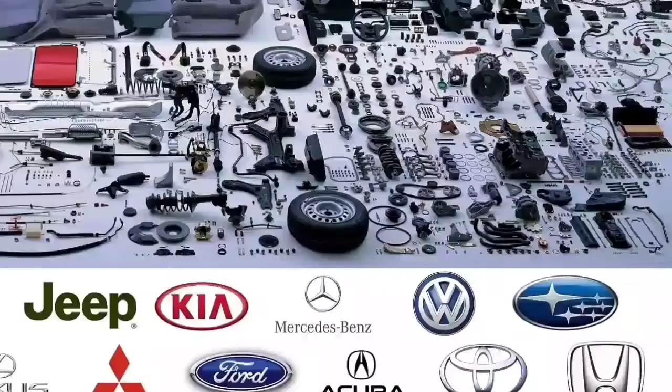Welcome to my video. In this video you are going to know about plastic in automobiles, types of plastic and the manufacturing processes. The advantages of using plastic in automobiles include fuel efficiency, innovation and design, sustainability, safety, and weather resistance. Then we are coming to our topic, plastic in automobiles.

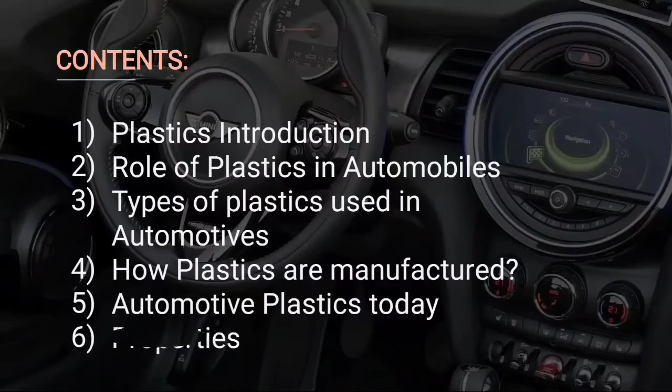See one by one, don't get bored. We will see the content of the video one by one. The first is plastic introduction, and the second is role of plastic in automobiles. Third is types of plastic in automotives, and fourth is how they are manufactured. Fifth is automotive plastic today, properties.

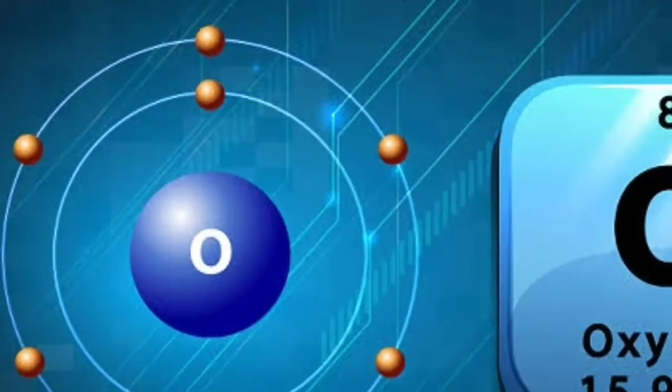Plastics are polymers. A polymer is something made of many units as a chain. Each link of the chain is a mer or basic unit that is made up of carbon, hydrogen, oxygen, and sometimes silicon. To make this chain, many links are hooked or polymerized together.

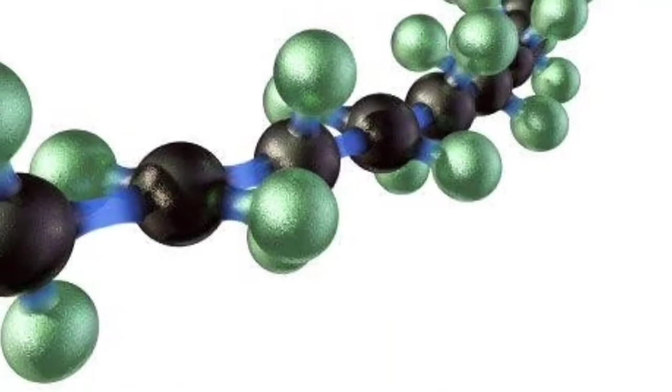Polymerization can be demonstrated by linking strips of construction paper together. Many polymers consist of hydrocarbons. These polymers are specially made up of small units bonded into long chains. Carbon makes up the backbone of the molecules and hydrogen atoms are bonded along the backbone.

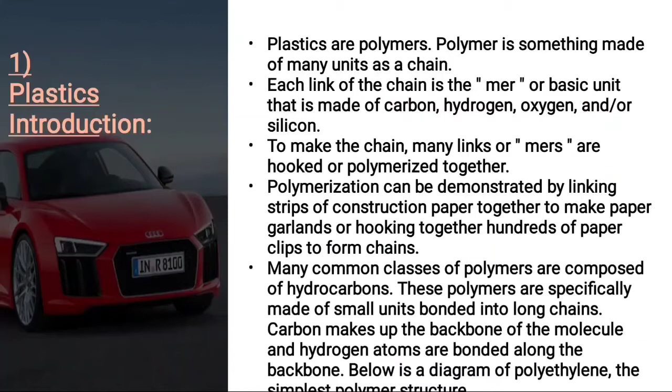In the previous picture we can see the structure of the polymer.

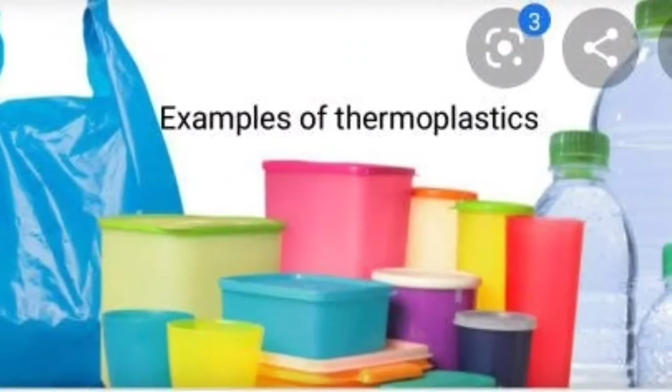Thermoplastics. A thermoplastic is a polymer whose molecules are held together by weak secondary bonding forces that soften when exposed to heat and return to original conditions when cooled back to room temperature. When a thermoplastic is softened by heat, it can be shaped by extrusion, molding, or pressing.

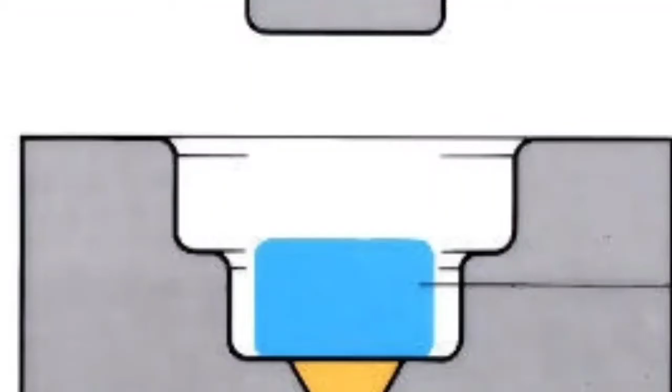Thermoplastics offer a versatile and wide range of applications. They are commonly used in packaging because they can be rapidly and economically formed into any shape needed to fulfill packaging functions. Examples include milk jugs and carbonated soft drink bottles.

There are polymers that contain only carbon and hydrogen: polypropylene, polybutadiene, polystyrene, and polymethylpentene are examples of this.

Even though the basic makeup of many polymers is carbon and hydrogen, other elements can also be involved: oxygen, chlorine, fluorine, nitrogen, silicon, phosphorus, and sulfur are other elements found in the molecular makeup of polymers.

PVC contains chlorine, nylon contains nitrogen and oxygen, polyester and polycarbonates contain oxygen, and vulcanized rubber and Thiokol contain sulfur.

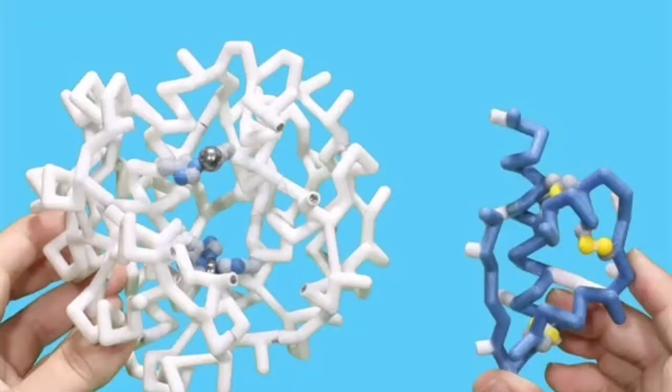There are also some polymers that, instead of having a carbon backbone, have a silicon or silicon-oxygen backbone. These are considered inorganic polymers.

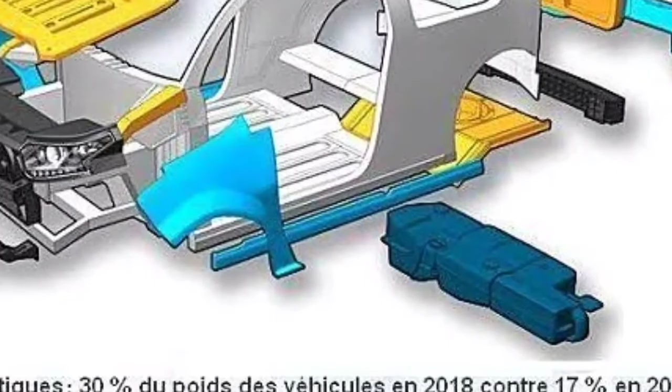Next we will see the second part of our content: role of plastic in automobiles. Automotive plastics have changed the way that cars are made. Every part of a modern car, from performance to aesthetics, is impacted by plastics.

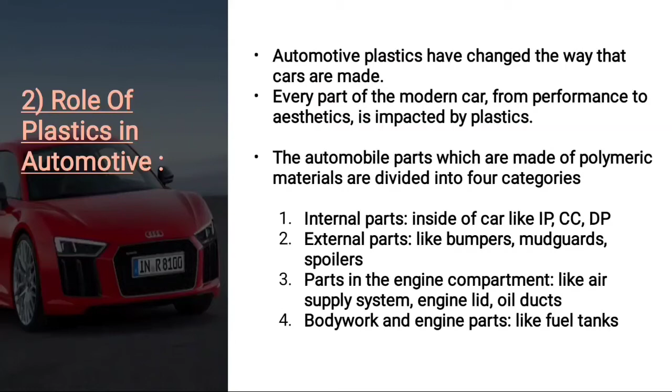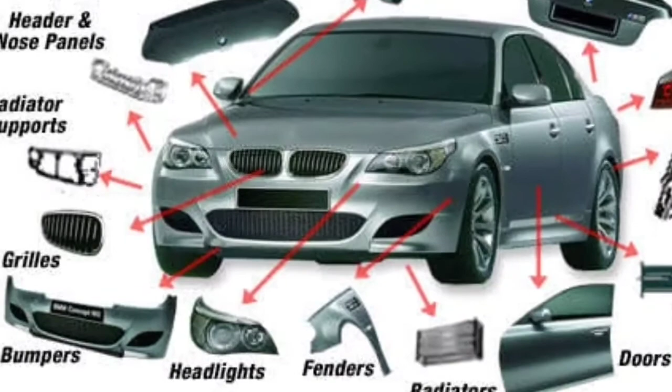The automobile parts made up of polymeric materials are divided into four categories: internal parts like inside the car, external parts like bumpers, mudguards and spoilers, engine components like the air supply system, engine lid and oil ducts, and body work and engine parts like fuel tanks. Currently there are about 30,000 parts in a vehicle, of which one-third are made from plastics.

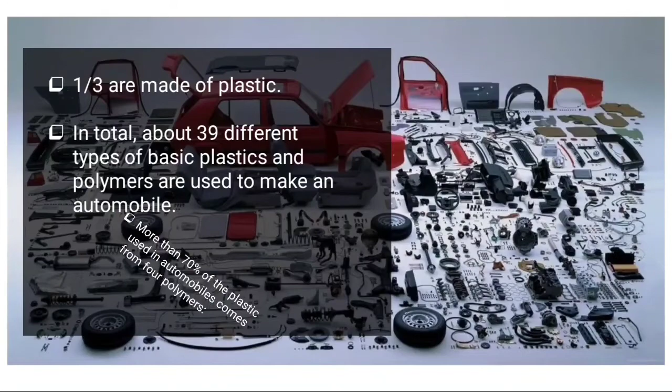In total, about 39 different types of basic plastics and polymers are used to make an automobile. More than 70% of plastics used in automobiles come from four polymers.

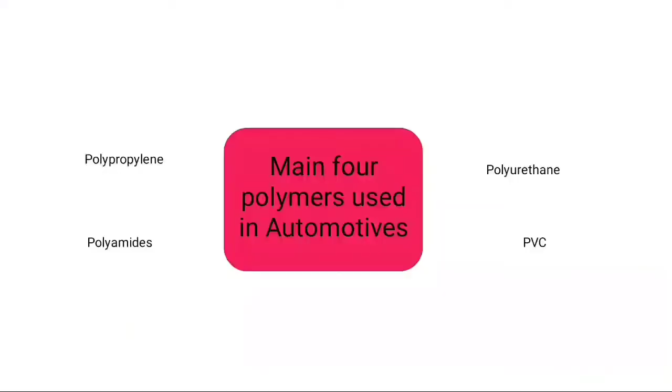Next, we see the main four polymers used in automobiles: the first is polypropylene, then polyurethane, polyamides, and PVC, polyvinyl chloride.

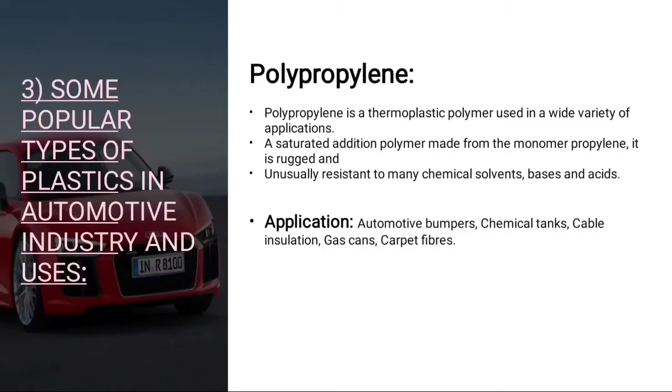Polypropylene is a thermoplastic polymer used in a wide variety of applications. It is a saturated addition polymer made from the monomer propylene. It is rugged and unusually resistant to many chemical solvents, bases, and acids. Applications: automotive bumpers, chemical tanks, cable insulation, gas cans, carpet fibers.

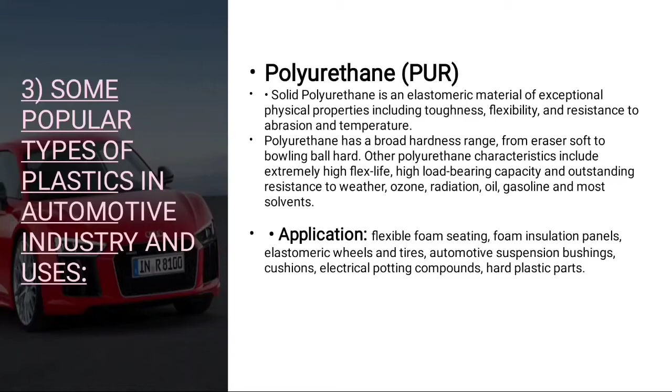Polyurethane: solid polyurethane is an elastomeric material with exceptional physical properties including toughness, flexibility, and resistance to abrasion and temperature. Polyurethane has a broad hardness range from eraser soft to bowling ball hard. Other polyurethane characteristics include extremely high flex life, high load bearing capacity, and outstanding resistance to weather, ozone, radiation, oil, gasoline, and most solvents. Applications: flexible foam seating, foam insulation panels, elastomeric wheels and tires, automotive suspension bushings, cushions, electrical potting compounds, and hard plastic parts.

Polyvinyl chloride (PVC) has good flexibility, is flame retardant, and has good thermal stability, high gloss, and low lead content.

Polyvinyl chloride moulding compounds can be extruded, injection molded, compression molded, calendared, and blow molded to form a huge variety of products, either rigid or flexible depending on the amount and type of plasticizers used. Application: automobile instrument panels, sheathing of electrical cables, pipes, doors.

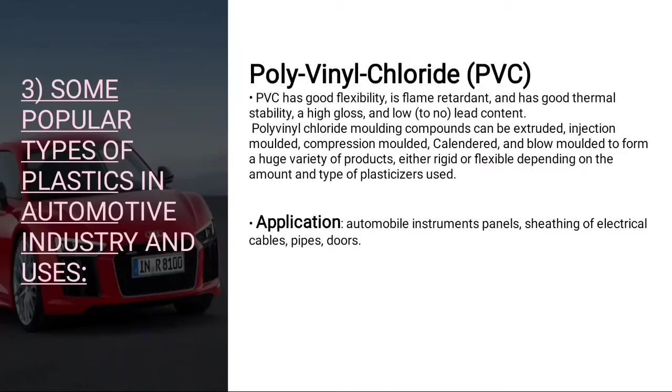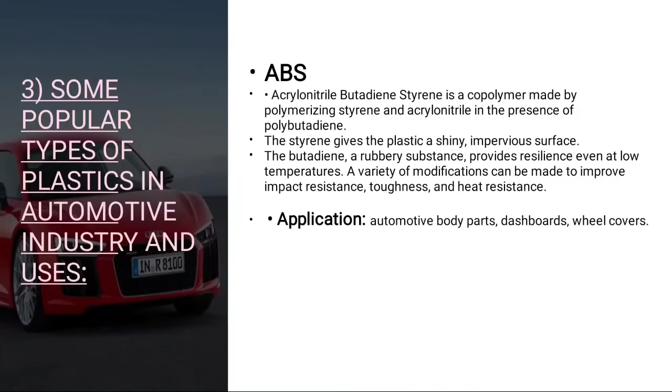ABS, Acrylonitrile butadiene styrene, is a copolymer made by polymerizing styrene and acrylonitrile in the presence of polybutadiene. The styrene gives the plastic a shiny, impervious surface. The butadiene, a rubbery substance, provides the resilience even at low temperatures. A variety of modifications can be made to improve the impact resistance, the toughness, and the heat resistance. Application: automotive body parts, dashboards, wheel covers.

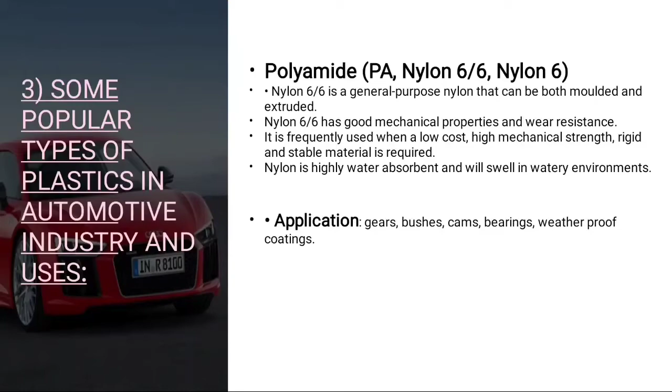Polyamide nylon 6/6 is a general purpose nylon that can be both molded and extruded. Polycarbonate is often used in automotive industry applications. These are applied mainly in non-reinforced condition, and their main application is in automobiles for manufacture of various parts of light assemblies. This is resistant to high temperature, transparent with the possibility of being painted into any nuance, with modulus in tension up to 2300 MPa.

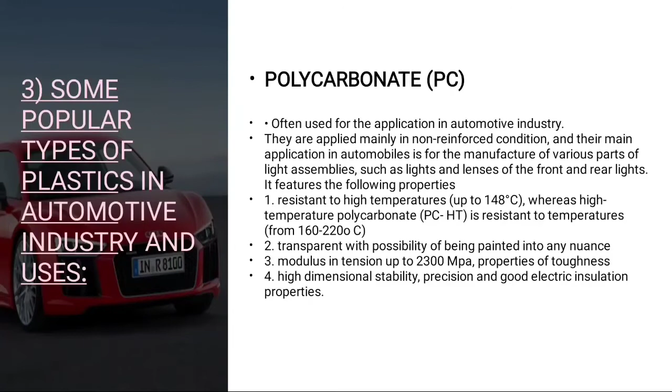How are plastics really made? Let's see one by one. The manufacturing processes are injection molding, rotational molding, extrusion processes, blow molding, and thermoforming.

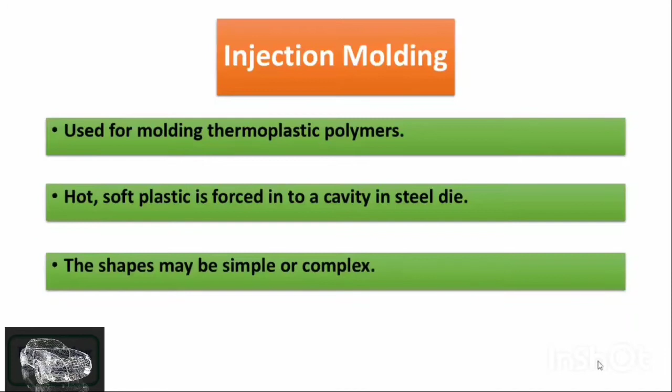Injection molding is used for molding thermoplastic polymers. In this method, hot and soft plastic is forced into the cavity in a steel die. The most important thing about injection molding is that the shapes of the articles may be simple or complex. Let us understand the process of injection molding.

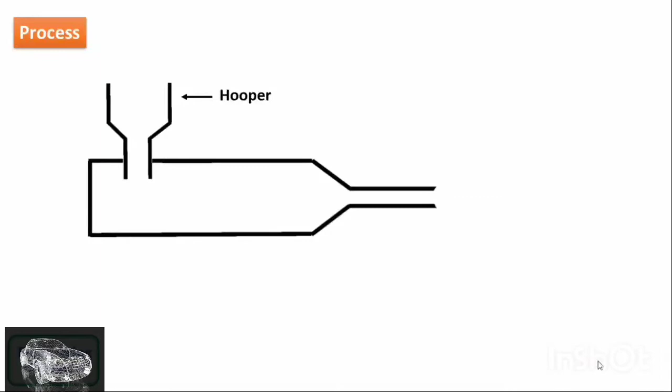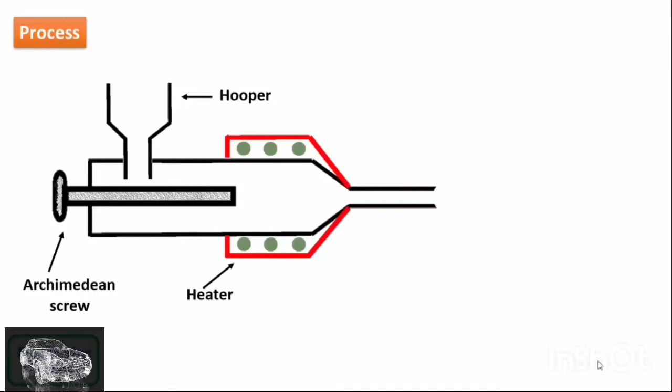It consists of a machine with a hopper in which all the ingredients of the plastic will be taken. On the left hand side, it consists of an Archimedean screw to push the materials in the forward direction. In the middle there is a heater to melt the plastic ingredients. On the right hand side we have the mold cavity, formed by the molding parts maintained in the cold condition.

As we have already seen, this method is used for thermoplastic polymers. Thermoplastic polymers are formed by addition polymerization, and these reactions are always exothermic. Hence it has to be carried out in cold conditions to take the reaction in the forward direction.

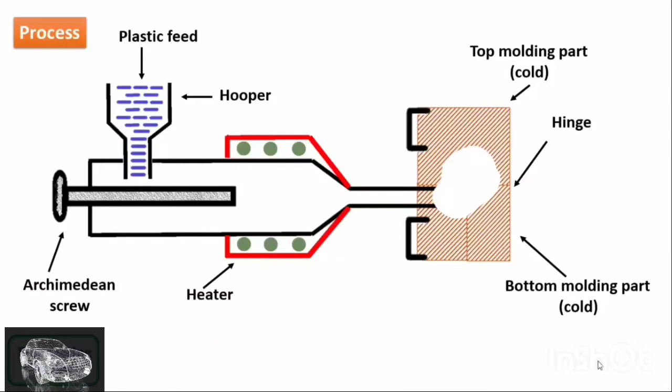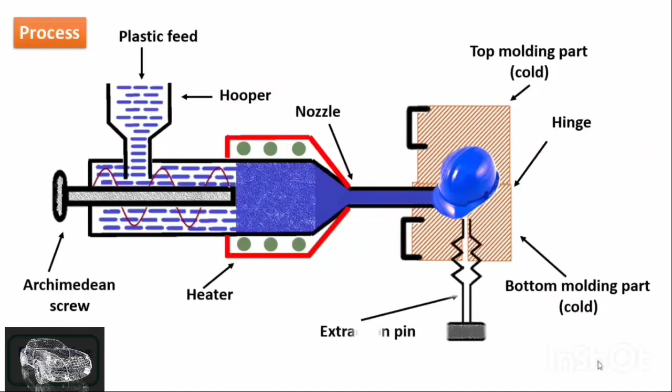The plastic ingredients are taken into a hopper, and with the help of gravitational force it falls into the machine. When the Archimedean screw is rotated, the material is pushed into the heated region where it melts, and at the nozzle the temperature increases to such an extent that it quickly enters into the mold cavity, where curing is done. Here curing means cooling of the plastic material. Finally, with the help of an extraction pin, the article is taken out.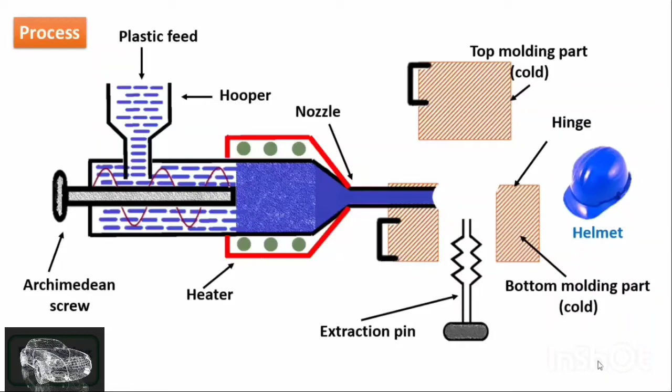This helmet has a very complex shape and it is very difficult to prepare by any other method. So injection molding is the right solution to make these kinds of complex materials.

Let us see the advantages of injection molding: fast production, low labor cost, design flexibility. It can be used to produce very small parts. It has good color control, and very importantly, it has good product consistency.

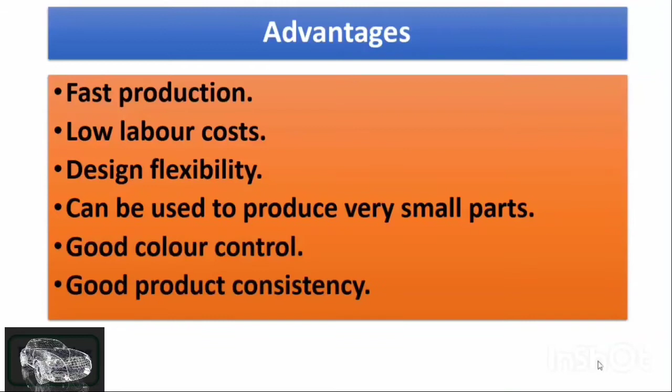It has a few disadvantages also. The first is high capital cost of the injection molding machine, and the second is the molds are also very costly.

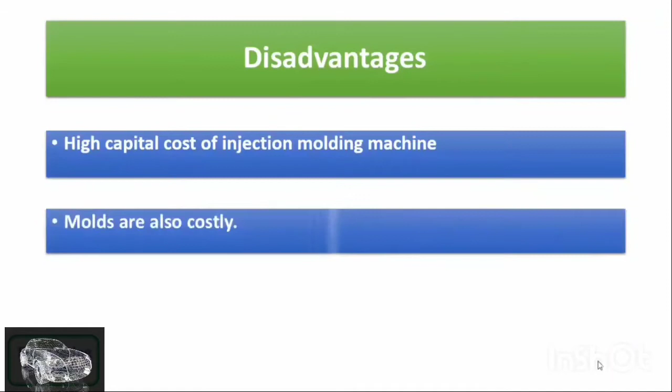Next, we are going to see the rotational molding process. The rotational molding process is also known as rotomolding or rotational casting, and it is a unique molding process. Today, the rotational molding industry is one of the fastest growing segments of the plastic industry with an annual growth of 10%. It includes heating, shaping, and cooling of plastics without any application of pressure.

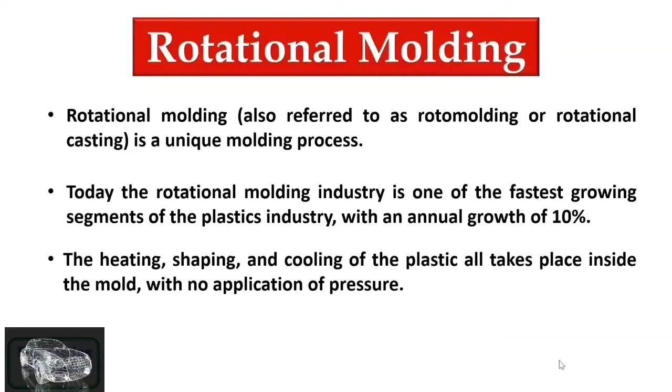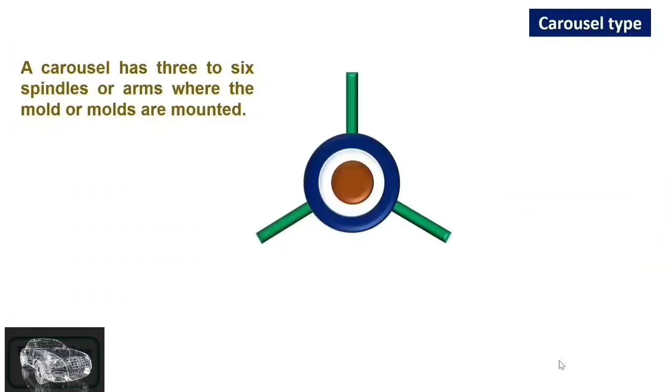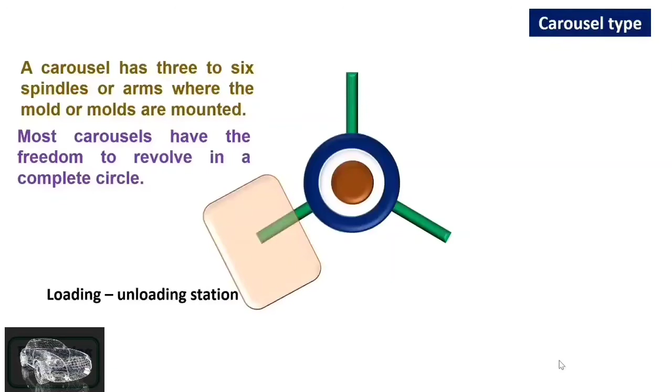We are going to see the types of rotational molding, and one is the carousel type. In the carousel type, it has 3 to 6 spindles mounted on the mold. It is free to revolve in a complete circle to form a revolutionary motion. It consists of loading and unloading stations where the molds are mounted. The spindles are mounted on the central hub and driven by variable motors.

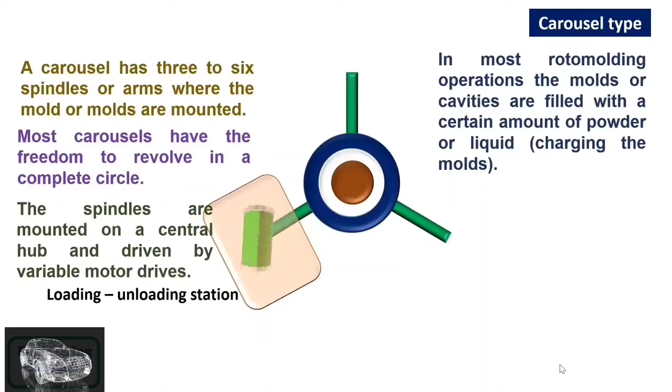The molds are filled with a certain amount of powder or liquid used for charging the molds. The mold halves are pressed together by the application of bolts or clamps, and they are placed in the heating oven. The ovens are fired with the help of natural gas or oil, or some types of ovens use propane gas as fuel. During the heating process, the resin melts and densifies into the desired shape of the mold.

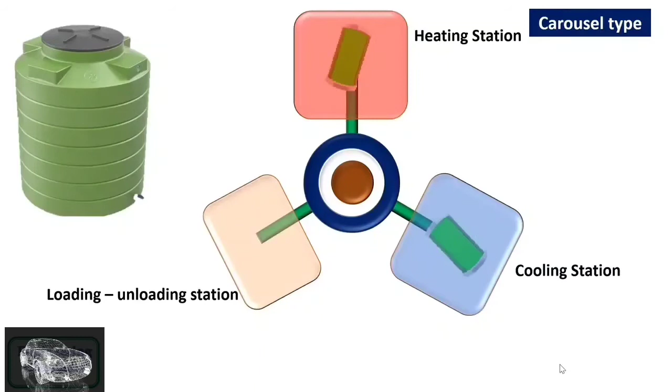Once the process has been completed, the molds are moved into the cooling chamber, where they are slowly cooled by air or water. Then the required object has been obtained. Once the process is completed, another cycle is initiated.

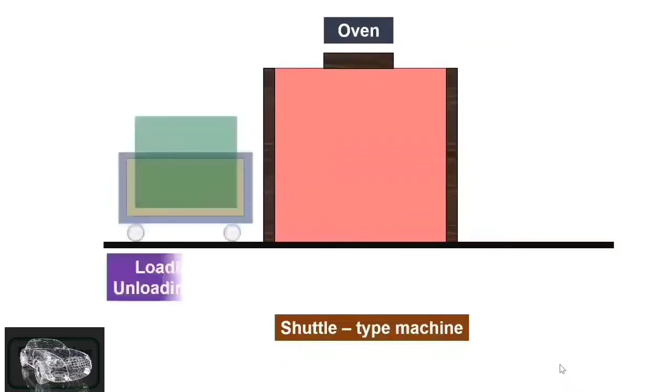Next we see the shuttle type machine. It is used for manufacturing large size products. It consists of an oven at the center, with a frame holding the load in a movable way, allowing it to move inside the oven.

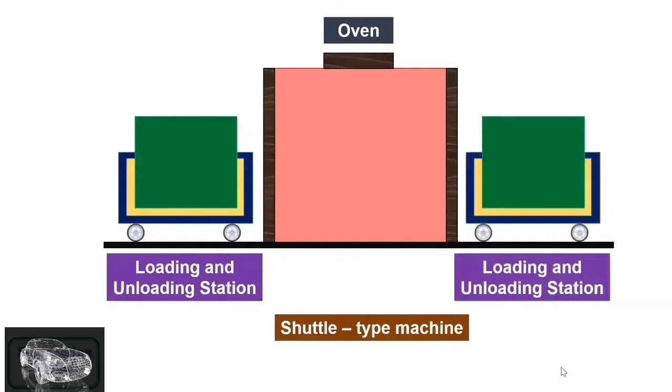After heating, the mold is moved into the cooling station, where like the previous station it is cooled by air or water. During this time, another frame holding a mold moves into the heating oven. It has alternating stations, station 1 and station 2, used alternately.

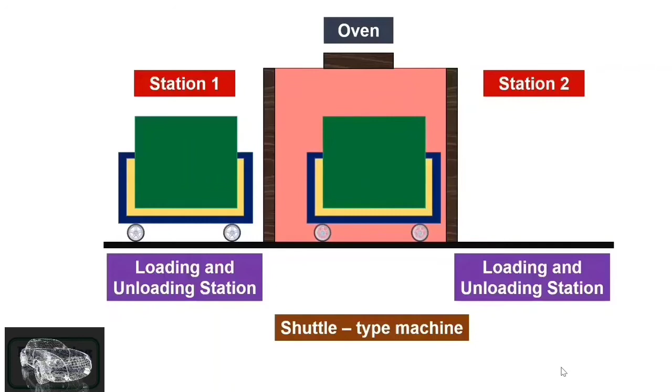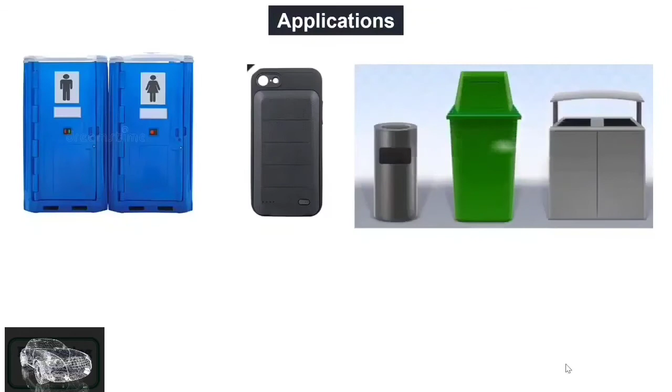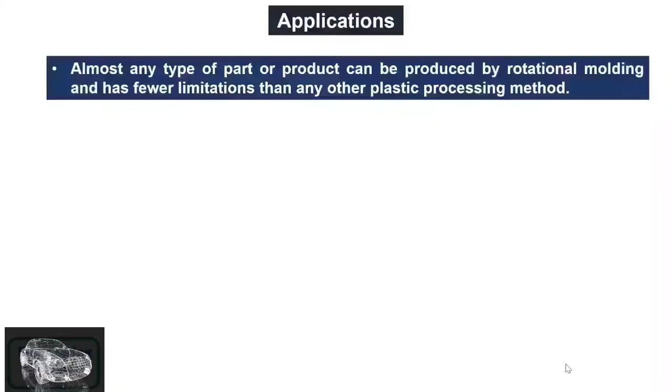We see the applications of rotational molding. It is used for making portable toilets, mobile phone covers, garbage tanks, septic tanks, vacuum cleaners, and some types of boards. Almost any type of product or part can be manufactured by rotational molding with fewer limitations compared to other methods. Rotational molding offers low equipment and mold costs with broad design parameters.

It is used for making tanks ranging in size from 19 liters to 88 cubic meters, and it is also used in agriculture, chemical, and recreational vehicle industries.

Now we are going to discuss extrusion molding. It is used for thermoplastic polymers. Using extrusion molding, long articles are also manufactured.

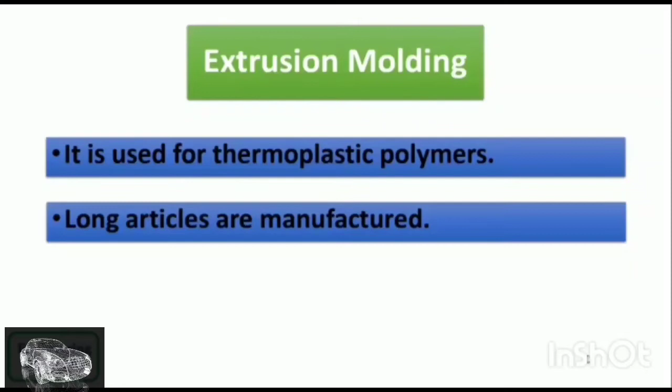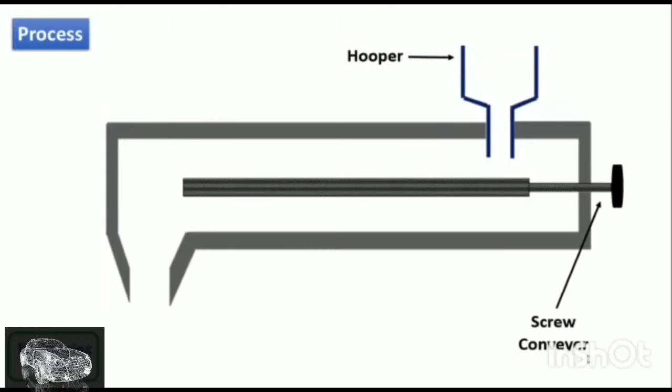Now we discuss the process. It includes a screw conveyor and a hopper at the top in which plastic granules are poured. A heater is used to melt the plastic granules. The plastic granules are first poured into the hopper, then they reach the screw conveyor.

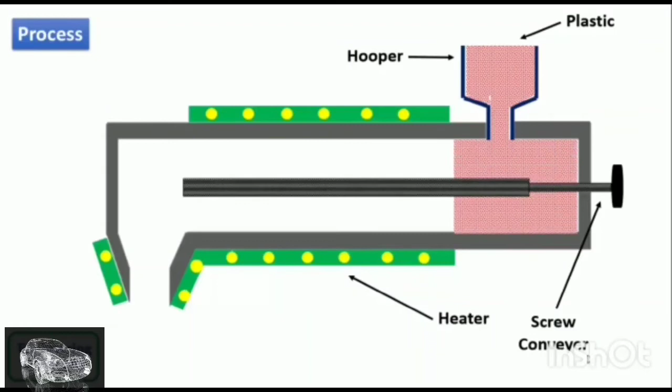The screw conveyor rotates in order to push the plastic granules. Because of the heater, the plastic granules are melted and become molten plastic.

Here the metallic wire is introduced so that we get a plastic coated cable outside, commonly called electric wire. Then it is cooled down and cut into the desired length. This is how long articles are manufactured.

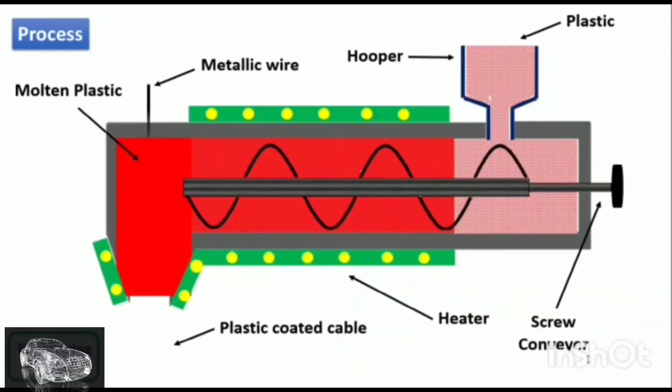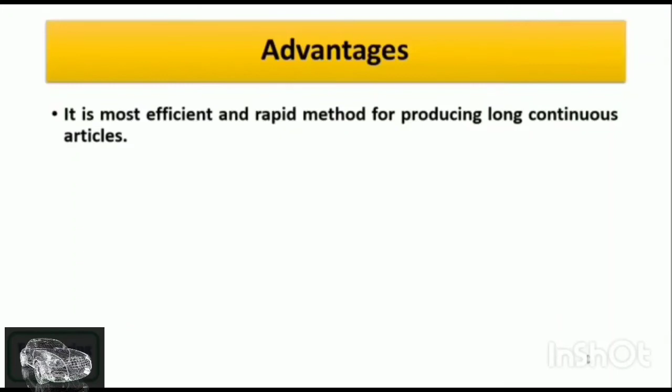Extrusion molding has a low cost relative to other molding processes. It provides considerable flexibility in manufacturing products. The plastic remains hot when it leaves the extruder, which allows post-extrusion manipulation. That means we can change the shape of the article even when it comes out of the machine.

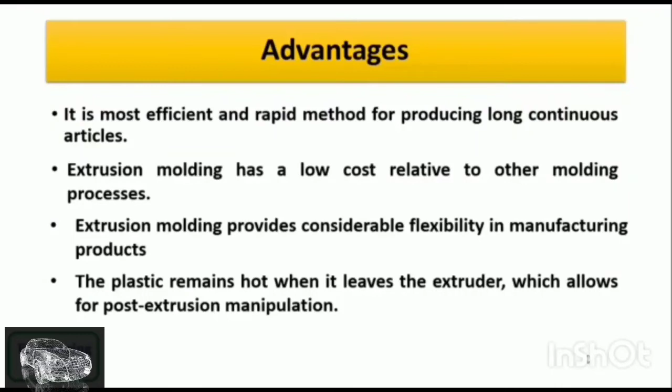Next, disadvantages of extrusion molding: it is used only for linear polymers. When the hot plastic exits the extruder, it frequently expands. The nature of the extrusion molding process places limits on the kind of products it can manufacture.

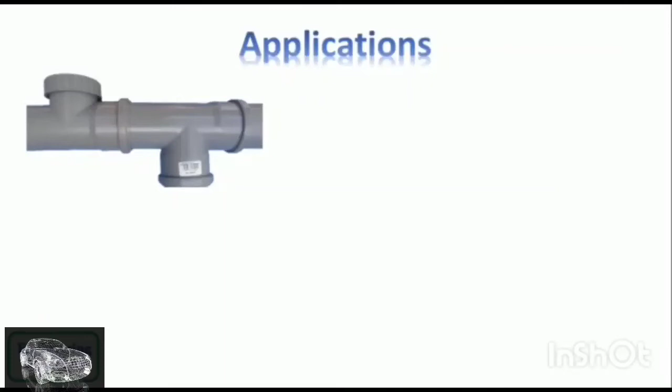Next, applications. It is used in PVC pipes, cables, wires, straws, and toothpaste tubes.

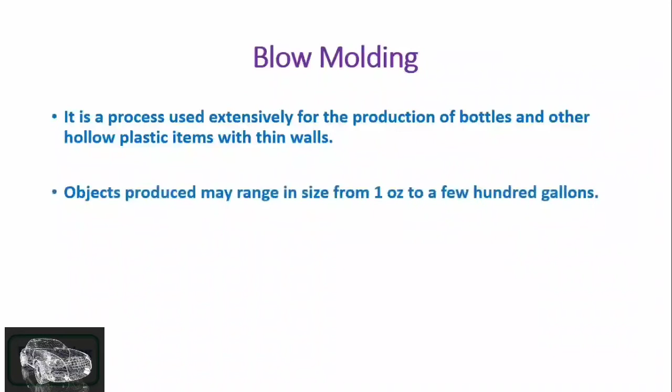In this video, we will learn about blow molding, one of the fabrication processes. It is a process used extensively for the production of bottles and other hollow plastic items with thin walls. It is also used to manufacture containers, automotive parts, water bottles, etc. Objects produced may range in size from 1 ounce to a few hundred gallons.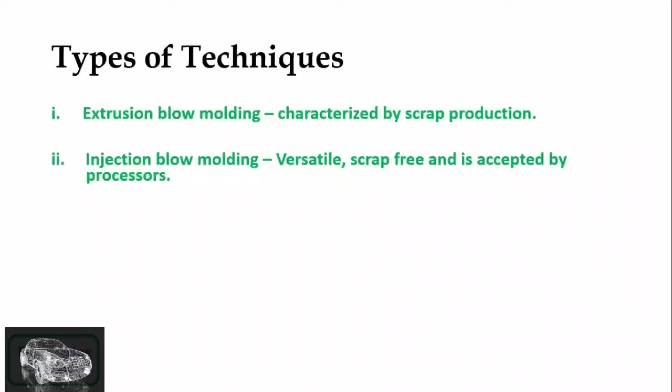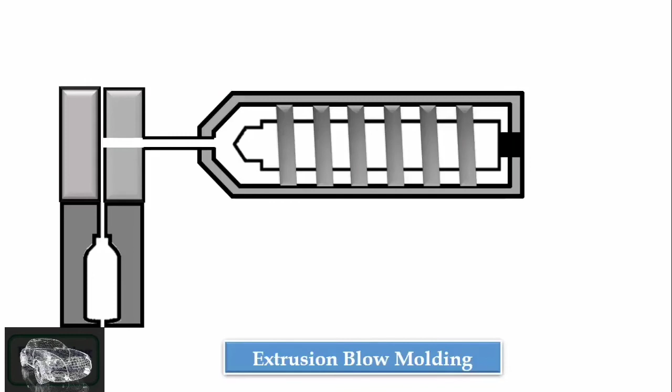Now let us see about intermittent extrusion blow molding. The equipment is same as injection molding. It consists of a machine with their respective mold parts, a hopper at the top and a motor at the side. In extrusion blow molding, an extruder is used to pressurize the resin and form the parison.

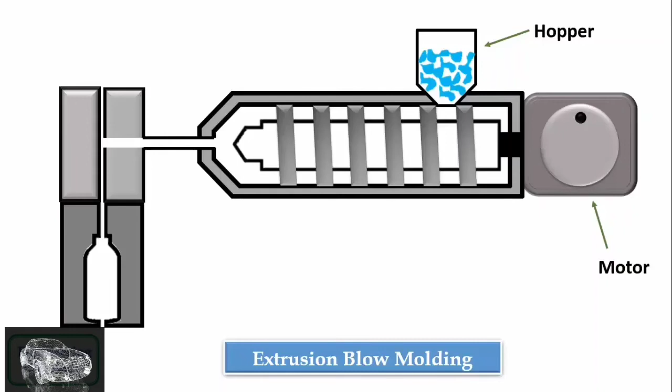First, we take all the ingredients required to manufacture the material into the hopper. With gravitational force, it is taken inside the machine. When we start the motor, all the ingredients are pushed into the heater region. The parison from the molten thermoplastic resin is then placed between the two halves of the mold of the desired shape.

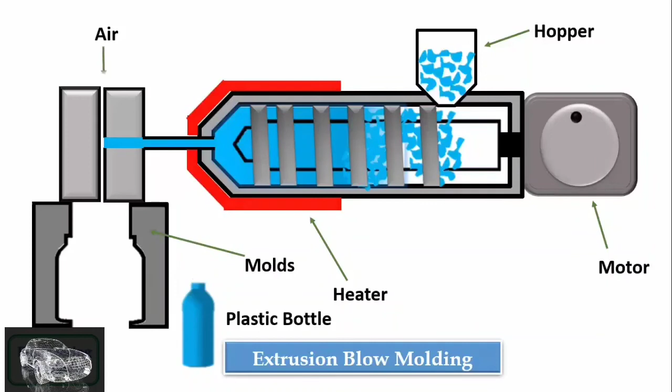If 100 psi of air is blown into the parison, it is followed by the cooling process. The part is cooled and removed from the mold. Excess plastic material, or flash, accompanying the molten part is taken out from the mold. That is how plastic bottles are manufactured.

In blow molding, let's see injection blow molding. It is a non-continuous cyclic process consisting of two phases. First, the parison is molded by injecting melted plastic into a steel mold cavity where it is kept hot and conditioned. In the second step, the parison is metered into a blow mold where the blowing operation takes place to form the final part.

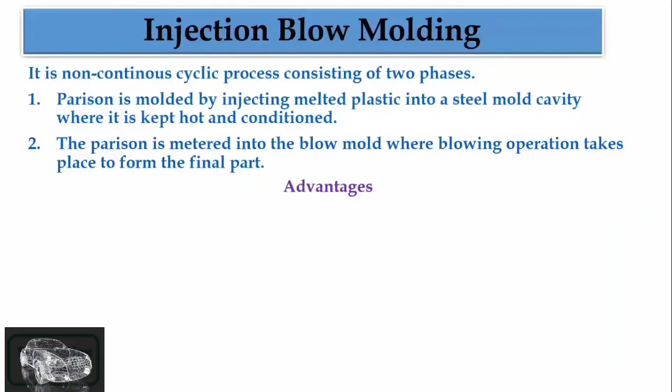There are various advantages in injection blow molding. First, good quality of molded parts and productivity. Second, there is no flash production. Third, the molded part neither has pinch-off scar from flash, nor requires additional trimming. Fourth, the molded parts show hardly any variation in weight, wall thickness and volume.

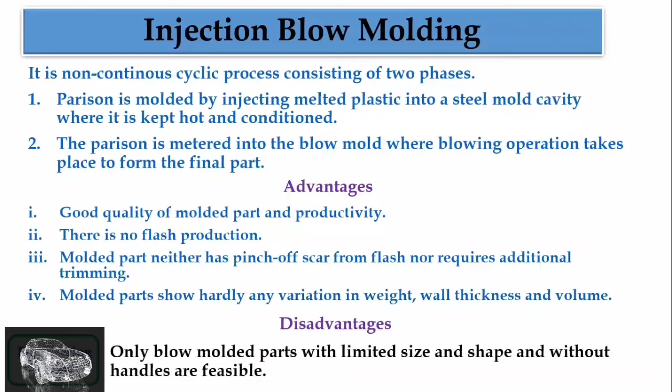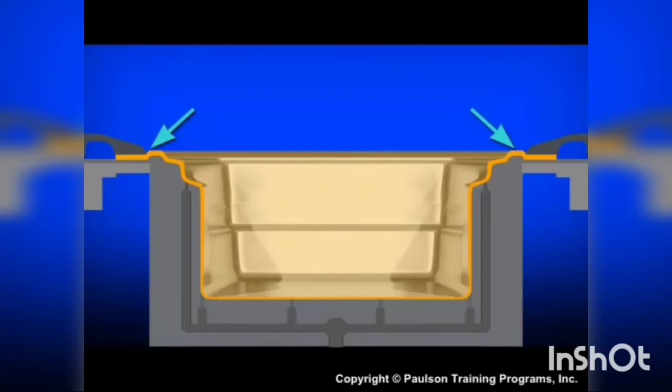Now, thermoforming methods. This is one of the simplest methods. Here, a plastic sheet is heated in a clamp frame. A vacuum removes the air underneath the sheet and pressurizes the sheet into a mold. Some regions stretch more than others. The thickest plastic is at the top flange that touches the mold surface and cools there, while it becomes very thin further down.

Now let us see about automotive plastics nowadays. High automotive performance demands parts that handle it all. Plastics perform from the engine to the chassis, throughout the interior to the exterior. Today's automotive plastics make up approximately 50% of the volume of a new light vehicle, but less than 10% of its weight. There are 5 types: safety, interior, exterior, chassis and electrical.

Safety: advances in today's materials save countless lives. Airbags, windshields, sunroofs, plus energy absorbing innovations reduce vehicle fatalities. Plastic front end modules, modular seats and energy absorbing bumpers help save lives every year.

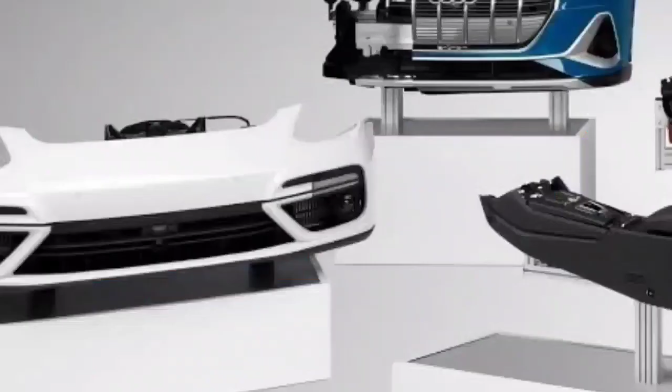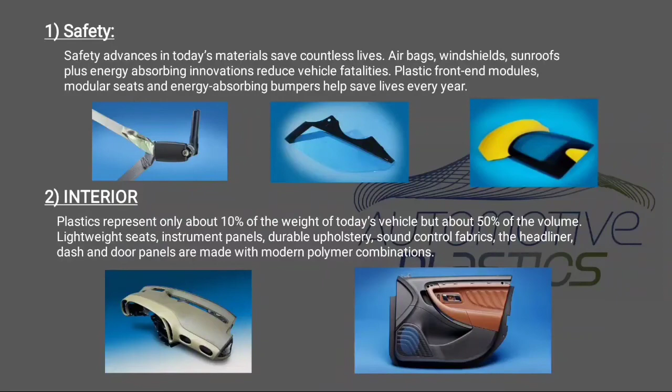Next, interior. Plastics represent only about 10% of the weight of today's vehicle, but about 50% of the volume. Lightweight seats, instrument panels, durable upholstery, sound control fabrics, the headliner, dash and door panels are made with modern polymer combinations.

The next one is exterior. Plastics are crucial to vehicle exteriors: lights, bumpers, hoods, lift gates, trim, it's all there for you to see. Plastic resists extreme weather while helping reduce emissions, improve safety and increase savings at the pump.

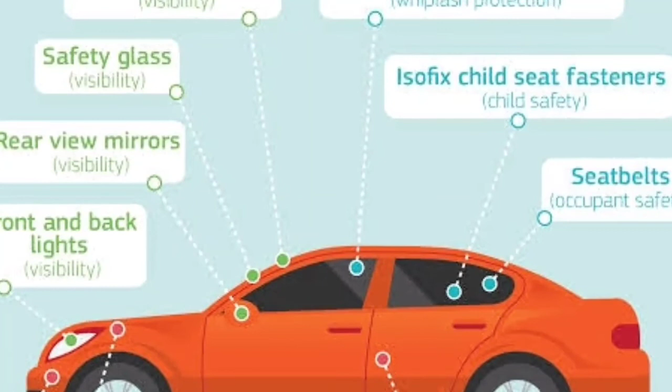The fourth one is chassis. Plastics are crucial in the chassis market. Innovation in plastic technology displays successful structural applications each year. It would not be possible to achieve many of these enhancements as efficiently and with the same performance using other materials. See today's chassis structure and hardware: plastics are strong and lightweight, bolstering the chassis or structure of the vehicle.

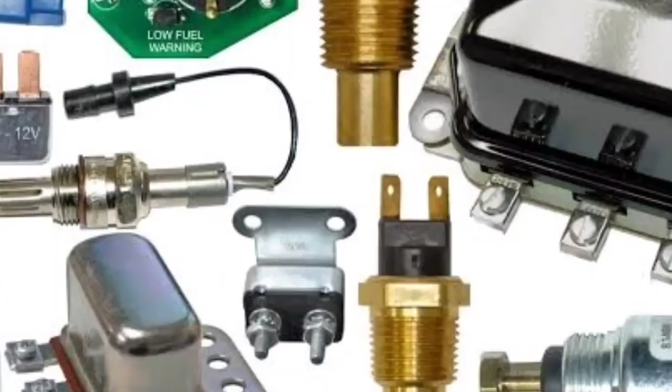And the last one is electrical. A car's electrical system used to be limited to a few components, not anymore. In the last 20 years, a car's electrical anatomy has undergone major changes. Electrical components now automate systems from ABS to satellite radios. Plastic makes that possible, including switch sockets, connectors and lighting.

Properties of using plastic rather than metals: lightweight, transparency, low cost, corrosion resistance, wear resistance, low thermal conductivity and electrical insulation.

We hope you guys understand plastic in automobiles.